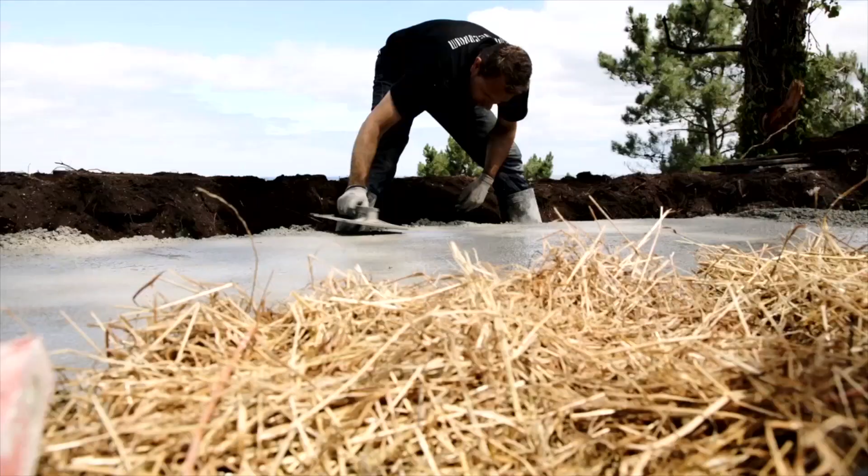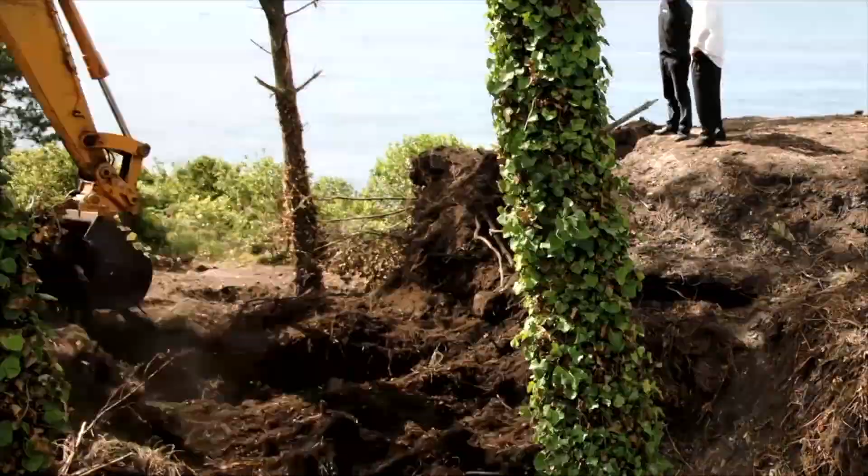This is an early project that we did, not really knowing what we were doing—just removing and putting together everything that we found on the site, a beautiful cornice of the Atlantic, putting together the existing matter: a bowl of soil just removed from the place, a volume constructed with hay bales. We cast unreinforced concrete on it, covered it, contaminated this prefabricated chunk of matter, this stone, and let it cure there.

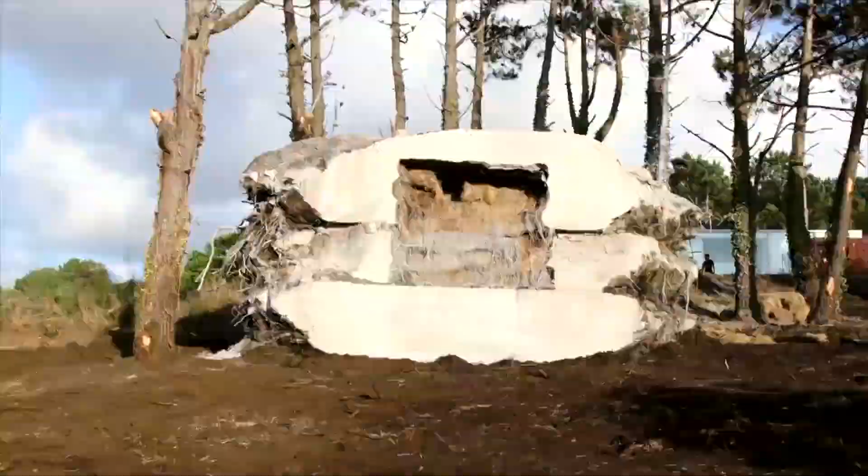And we named it the Truffle. The Truffle, almost as a parasite of nature, something that grows informally attached to that savior, to that life that is part of nature. But it was not yet an architecture project—we let it rest for a while, not really knowing what we were going to obtain from it.

What we discovered was these different lives of concrete—all this abrasive, viscous, very expressive material reacting to the cut we had just done, even though we hadn't yet revealed the space. We were already seeing all those encounters between architecture and landscape, all that age, all those wrinkles. We didn't yet have the tools to transform that.

So we borrowed cattle from our neighbor to help the process of carving out through the action of eating—curating the animal into that space, stable initially for a long year, making that long time, that long event, part of the fable, part of the narrative of how slow and sedimented all our actions should become when we deal with nature.

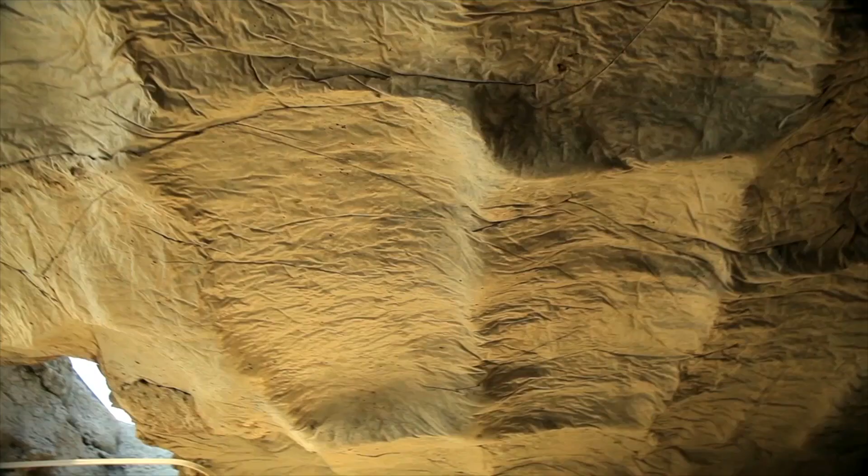All this rusticated viscosity, warm and aged already, contrasted with this liquidity of the lintel, as a petrified sea above the habitable space. And in the exterior, that informality that ultimately gave a figure to the truffle.

So this project stayed in our hearts for a long time, and a decade after, on the other side of the world, this is what makes architecture so fascinating.

We had a call from a couple of fantastic allies who wanted us to do something in this extraordinary, untouched landscape close to the Rocky Mountains, in a place called the Beartooth Mountains. This is where the continental and Pacific plaques collide, and it's another edge situation.

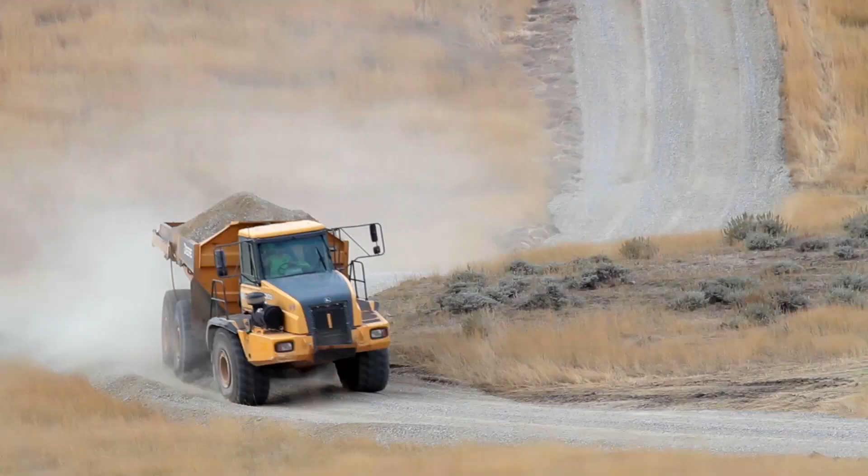It's where the Rockies stop, and suddenly there's a kind of cloth of hills, as you can see, without a tree, without a reference, without anything but cattle and wildlife, but always with that mountain on the border. So we were asked to do an art center, and we declined that idea, saying we couldn't incorporate any kind of referential building or human construct into that place. That would have ruined the experience of the program.

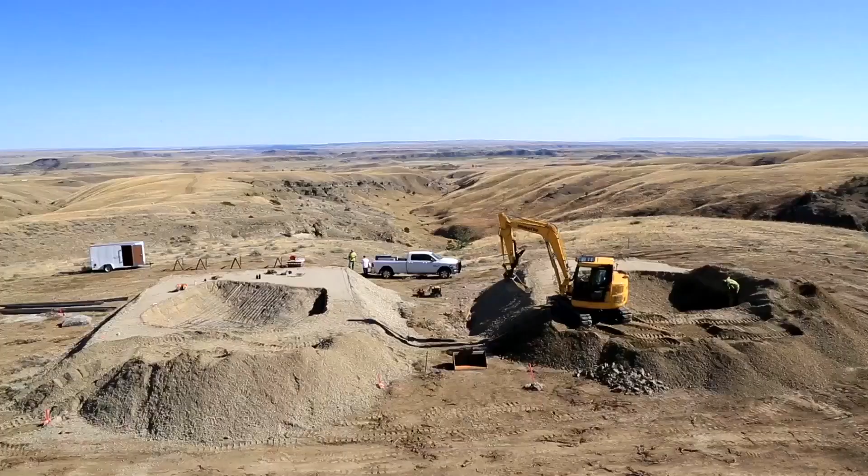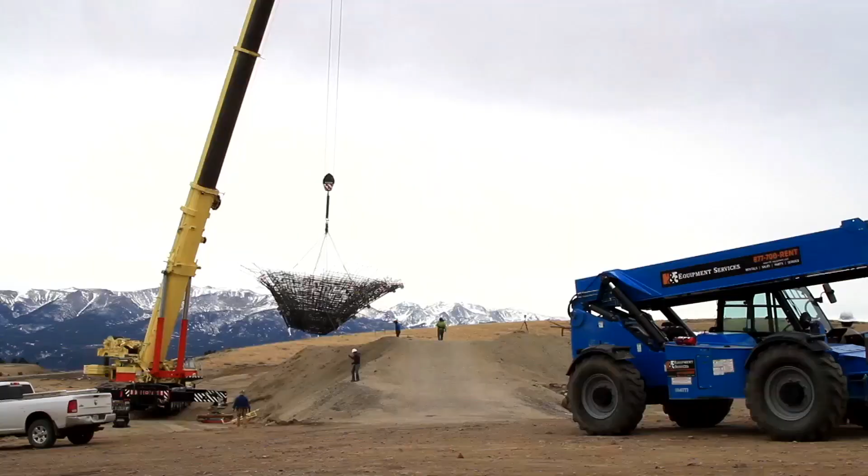That, by the way, was the contemplation of art, music experience, concerts, sculpture, but always in a special communion with the terrain, with the land. So we created a craft, a tectonic, and a language that had to be, we called it pre-architectural. We tried to avoid any kind of reference system or procedure we had previously known.

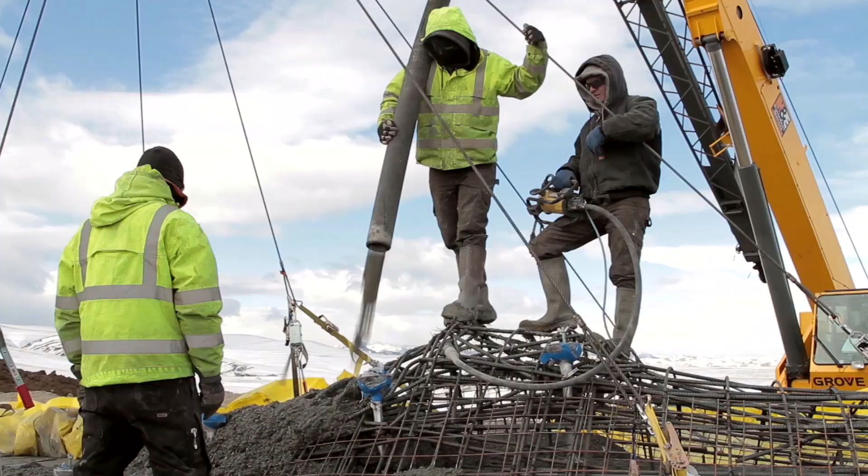So all our actions, as you can see in this video, was to emulate the gestures of the geologies of the place, using concrete as a very artificial conglomerate of all the soils, the crushed rocks, the pigmentation, but all done in a very wrong way - the anti-Swiss mode of doing concrete.

Just breaking all the given rules, not mixing properly the cast, wrinkling the formwork, throwing the pigments, contaminating, giving weaker resistance and not considering the thickness. And also

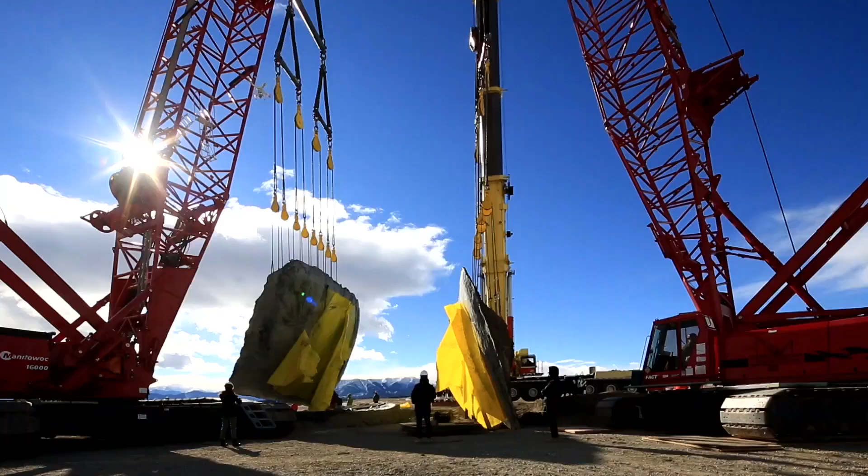preserving this fabulous moment of unearthing, of birth - all that excitement of a gravitatorial, I would say, initiatic moment. That slight contact, that crush, that connection, that arch is actually the portal, the entry, the door of the art center.

The art center is a constellation of pieces that refer to each other as stones or as stars that were dropped there. So these situations of very primal equilibrium, informal and

raw, create within the program the entries to that experiential or human world previously occupied by ranching and wildlife activities. So without being very disruptive, we tried to immediately connect with, I would say, the primal souls of the place - these kind of totemic figures.

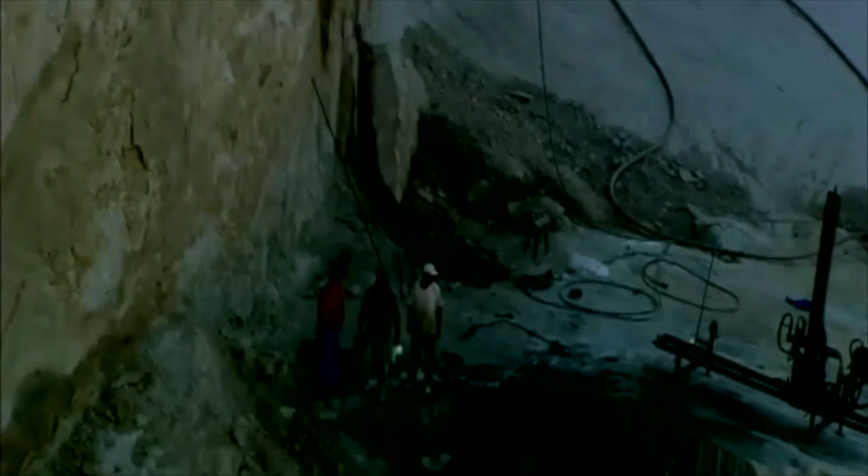Or a second project that we did in the same plot, also in Santiago de Compostela, where our challenge was to go a little bit backwards within the culture of Santiago de Compostela that is well known since the early medieval ages. But there's an outstanding megalithical culture that goes from Galicia all the way to La Bretagne, with a lot of megalithical constructions that we want to honor.

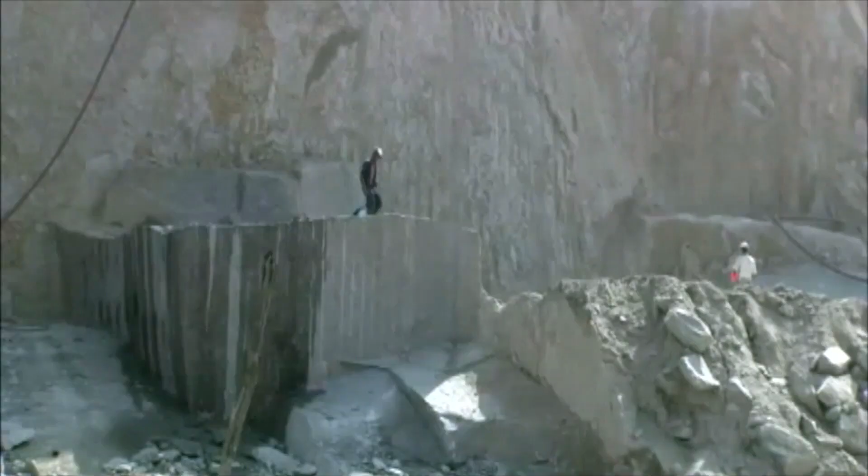So we had the capacity to convince our historical commission that our look to history was longer than the city, but still part of the place. We wanted to make that connection between the megalithic tectonics and all its limitations by mass, weight, and cut of these pieces, and the contextual of the place.

So everything starts with an explosion. It's really violent, and this is what makes so fabulous this destruction, where everything that we produce begins. So we wanted to go to that origin, to that Big Bang, to see how all these initial pieces that are obtained through explosion or through the first cuts, that are extremely raw, could be used as an immediate architectonic part.

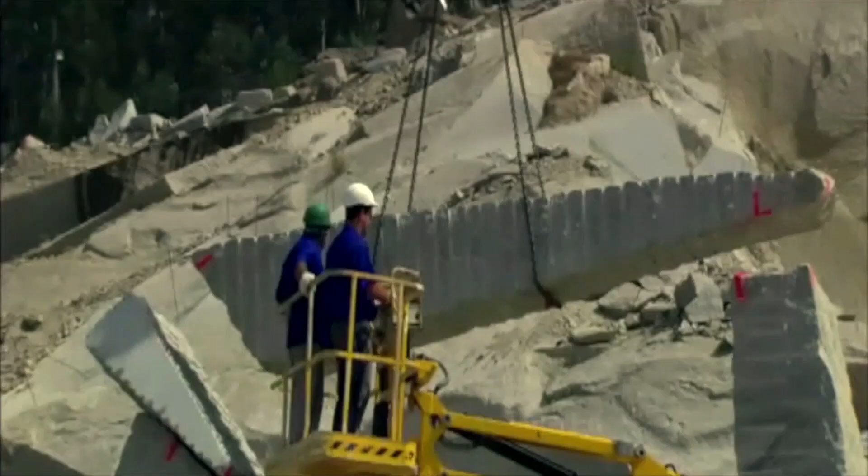Of course, we didn't have laser scans or photogrammetric techniques. This is pretty much 15 years ago. So we had to use the scientific method of try and error. We started to understand how important it was to be able to prefabricate something, to test it, to make it, to develop the technology, to develop the expressiveness, and ultimately to do the architecture project and the engineering.

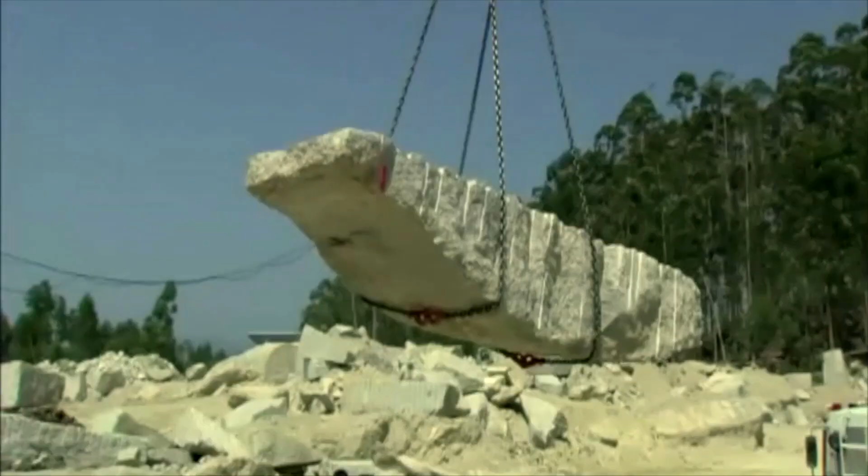Everything that started in the quarry, where we pretty much moved all our practice for several months. I will never forget that experience, because we had to choose, identify, pretty much sketch rapidly and try to figure out where the center of masses were, more or less, so we could find a way to grab it with those chains, convince all these guys to use their tools in our behalf, not just to crush those stones or cut them, but to precisely locate them in the places and in the order that we were dreaming of.

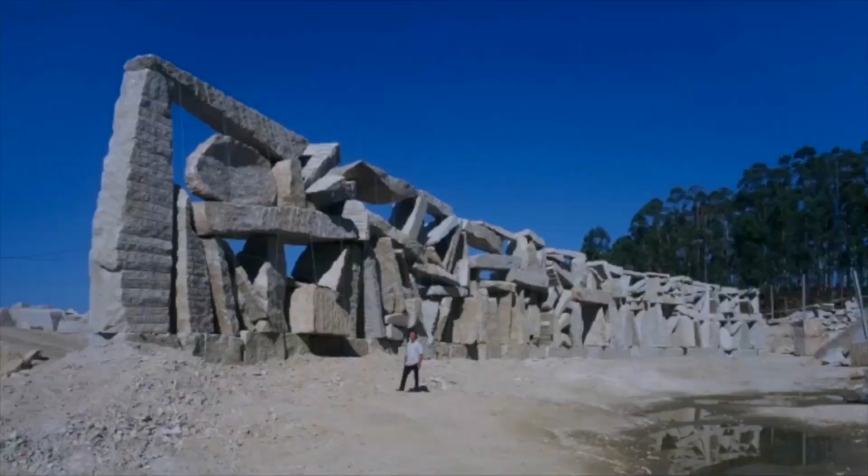Because again, we had not yet done the project. We had the license, we did something to serve the municipal government. It was blurry enough that we could pretty much do anything. And here is where we take use of the art world, because everything that is artistic is free. So that was, even though it's a structural wall, perfectly performative, and it weighs 1,000 tons, we could hide this structure under the idea of being an artistic facade, or I don't remember how we named it.

The fact is that we started placing one stone after another, and that went out of control, and we actually built the full structure in the quarry. It was beautiful, we measured it, and I still remember when I called my engineer, and he came to the quarry, he says, 'It looks pretty good, actually.' But there was no way to anticipate the performance or the behavior of all of those stones that were placed there.

Even though I always say that this is the most stable and safe structure I've ever built. Firstly, because I did it twice, and I could correct minor encounters. And the fact is that when we dismantled it to redo it on the site, we were also the contractors. I operated as GC, as general contractor here. I think it was the only way to be capable to do it.

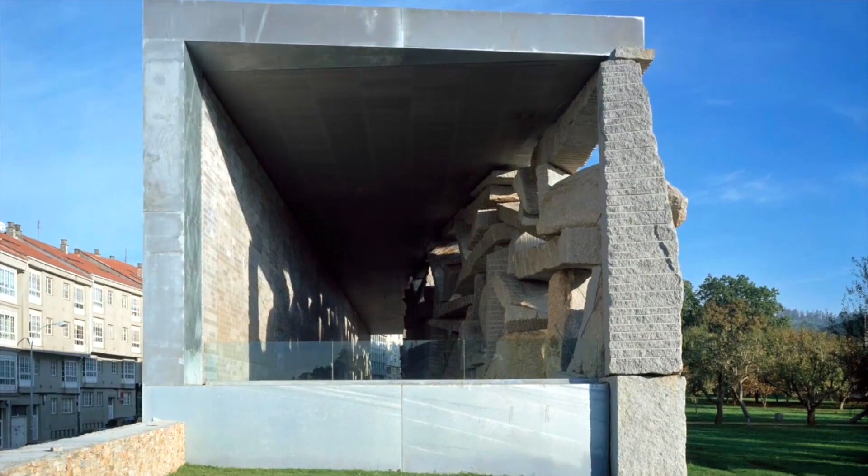But we discovered that once we had placed those stones in the quarry, by signing with a red spray where those gravitational connections were happening, we really were able to rebuild it in a fraction of the time, in a very safe condition. It seemed like those stones had already found their place and they were comfortable in their position. But again, the ultimate idea is that all these chunks of matter redistributed and reorganized become part of the architecture, archetypical part.

And now I'm in Menorca. Music, please.

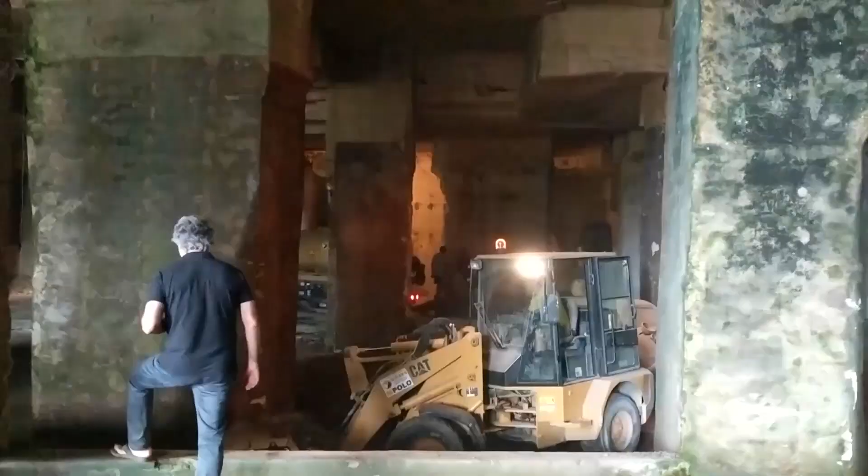This might be, I don't know, but one of the last projects I do with this attitude. And this is the most radical, because in this case I'm just not doing nothing. I had the fortune to find this beautiful abandoned mine in Menorca, and I just have to clean it and use the technology not to ruin it. And find a program, because I love it, I want to use it, but I don't know what to do with it.

So we started this by inserting light and air, as this first stone, this ceremonial moment of birth of architecture.

We did this event of chopping a stone from the lintel of the quarry with a little olive tree that arrived almost dead, but we put it vertically, through this oculus that has 9 meters deep into the gut of the terrain. We understand this is the first stone, the keystone of the equilibrium of all that given fruit of the earth. The rest of the project was 3D scanned.

Look at these beautiful drawings. I would love to say that these come from my gifted hand of representation, but they're just the 3D scans. So this opens another reflection about representation, what was the role of architects, how we can use technology to express an architectonical idea.

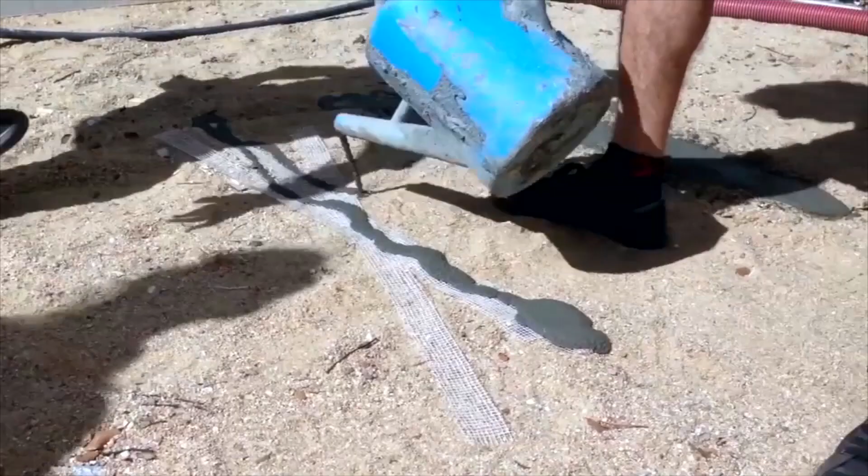Now we are doing—when I mean now, I mean that I was doing it yesterday. So not this part, but what you're going to see at the end. I think it's a non-edited video that I produced rapidly, but I think it was interesting to understand our vision of the architecture of the earth.

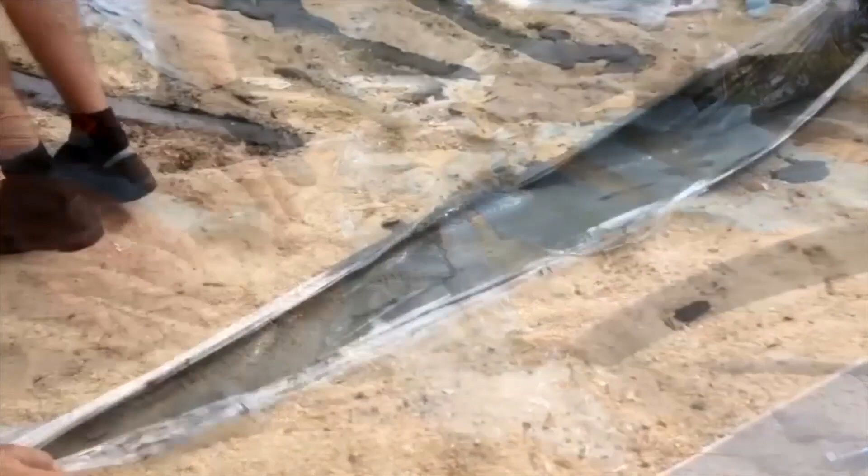This is an installation—a hybrid between an art piece and an architecture construct that we were commissioned to do, to celebrate a big exhibition that's going to be held in New York at the Cooper Hewitt Smithsonian Museum about nature. So they told us to do something in the beautiful garden they have in front of Central Park. So what we presented, and they accepted it...

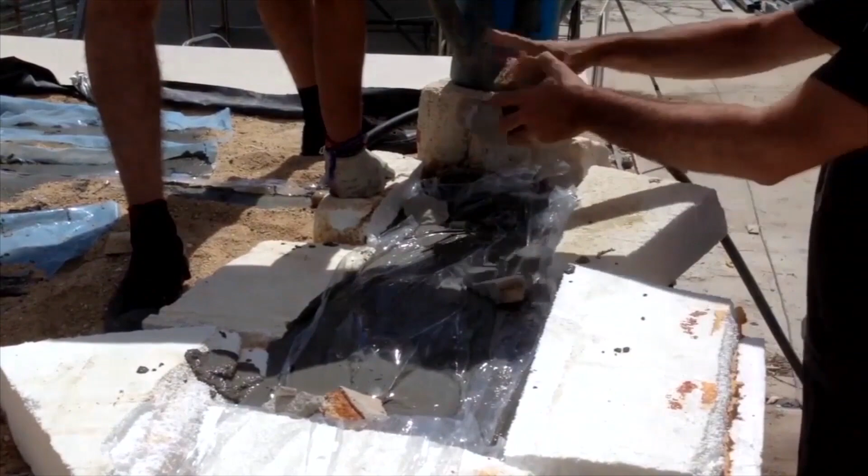We said that we were going to prefabricate a river, knowing that before architecture came to Manhattan, we gridded everything and flattened it, and we have that beautiful and amazing city that we all love. Before, the island was full of hills, rivers, and a lot of natural beauty that was not erased—it's there, it's kept, it's hidden, souterrain.

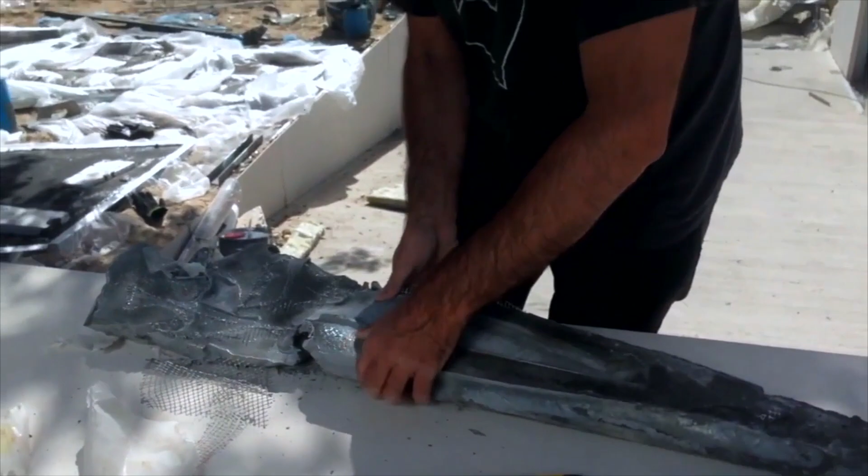So we're going to lift it, and fabricate this metaphor into a massive concrete structure. So that river—this is all the sketching process where we produced a lot of rivers, and some of them were structural, some were part of the standing point. So all these traces of structure, these beams, are performative like any other structure.

In the meanwhile, we were commissioned to do a little passerelle in China. So we used this same idea to create a bridge that was not jumping from street to street, it was part of the river. So this bridge...

was designed through all those traces, and we faced a dilemma, which is that we loved them all. We didn't care which fluidity was part of that building, that structure—understanding that when that concept is clear or knitted enough, the formal aspects of it are pretty much irrelevant. I think this is very, very surprising. It's like if you look at a stone and another stone, there's no formal preference.

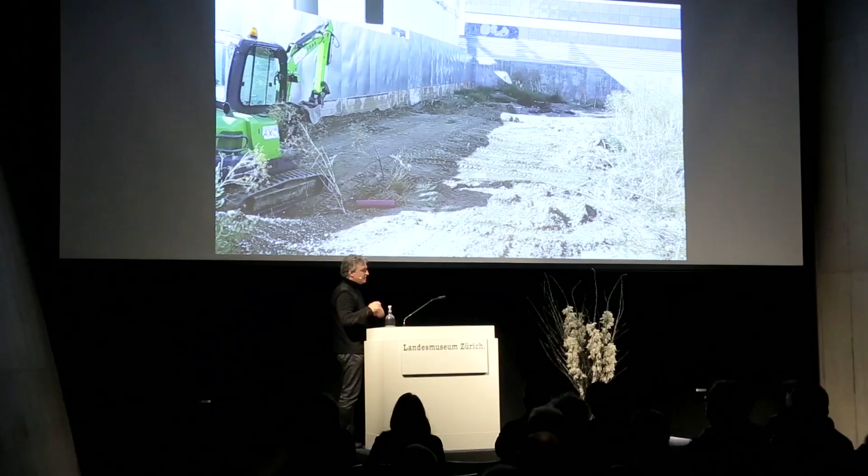So after all this back and forth, from a conceptual part to a more urbanistical relationship with the landscape, now we are abstracted, and these are images from last week, pretty much, where we did the prototype.

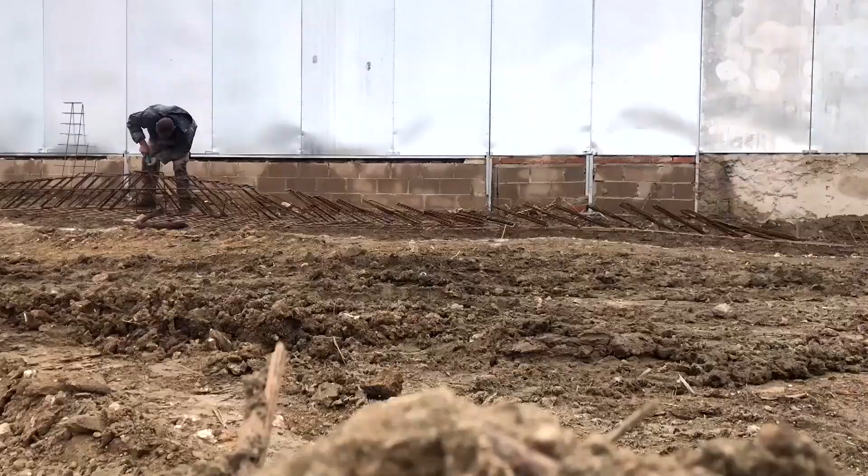It's not the real structure, but we did a prototype, at a scale I would say of 1 to 2. We will build another of these petrified rivers for the museum, but we wanted to rehearse it, to test it—not only mechanically, but also the materiality. As you can see, everything departs from the terrain with small preparation and a lot of uncertainty, and this is the contradiction.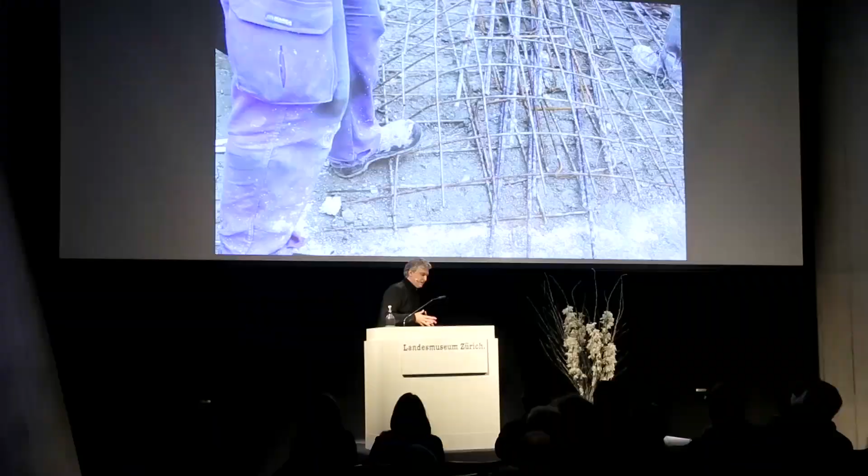How the formal, and I would say metaphorical, uncertainty given by the fluidity of the concrete when you let it loose has to be combined with a total precision of where those tensions travel through the guts—the reinforcement. So the combination of what you leave as freedom and what you control as the driver of that freedom is what we were working on.

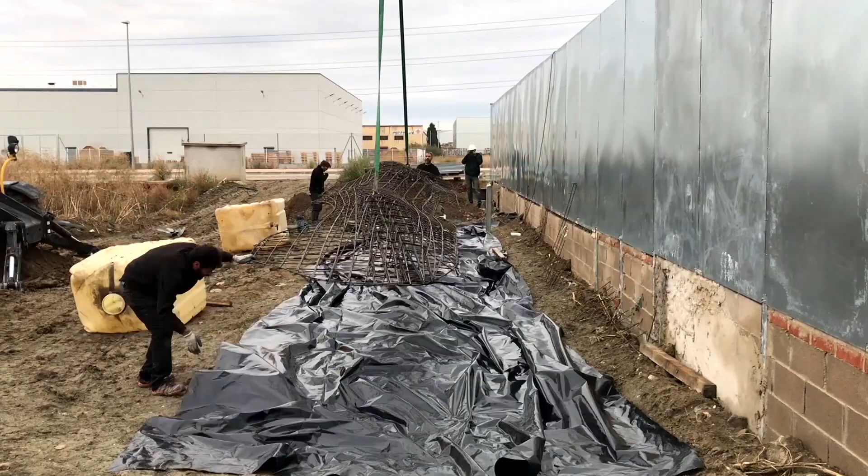So we decided to make a very simple differentiation. We were going to fully control the reinforcement and leave the liquid part of the composite beam pretty much flow and create that beautiful and poetic form.

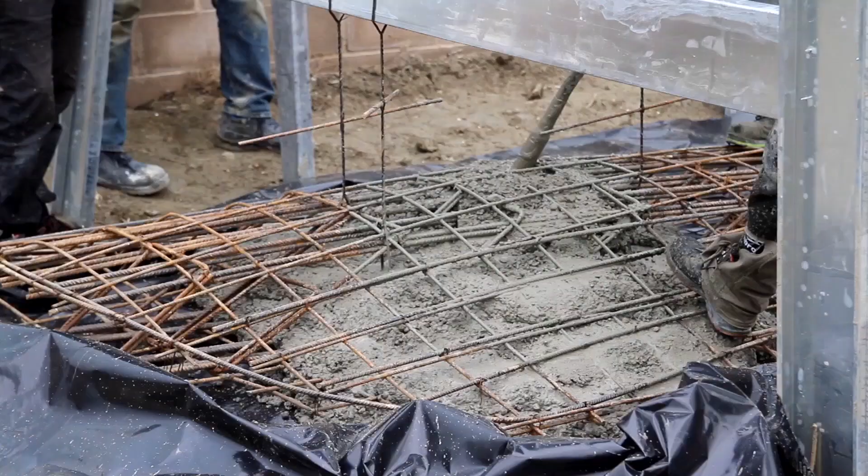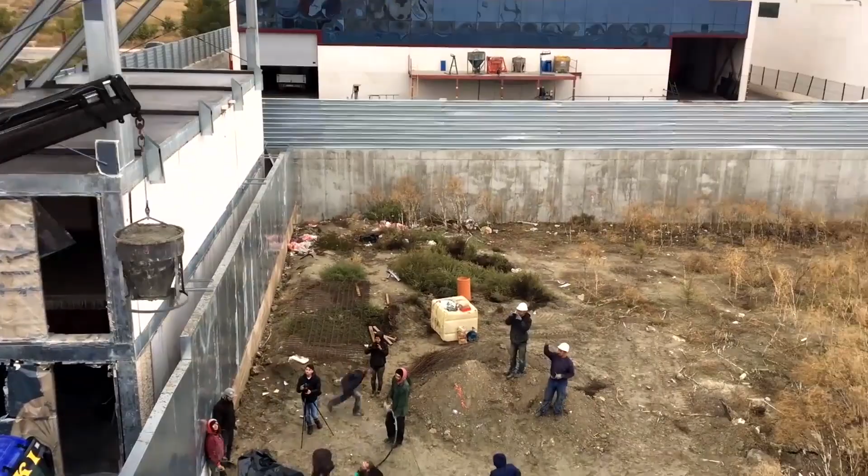The specific characteristic of this technique is just controlling, with a little bit of extra sensibility, the plasticity of concrete. So we just add more fluidificant or more water, depending on which part we want looser or straighter, or just to maintain it, and the amount of vibration. Somehow we are working with forces that we apply constantly to matter, to try to depict with them the ultimate appearance of the project.

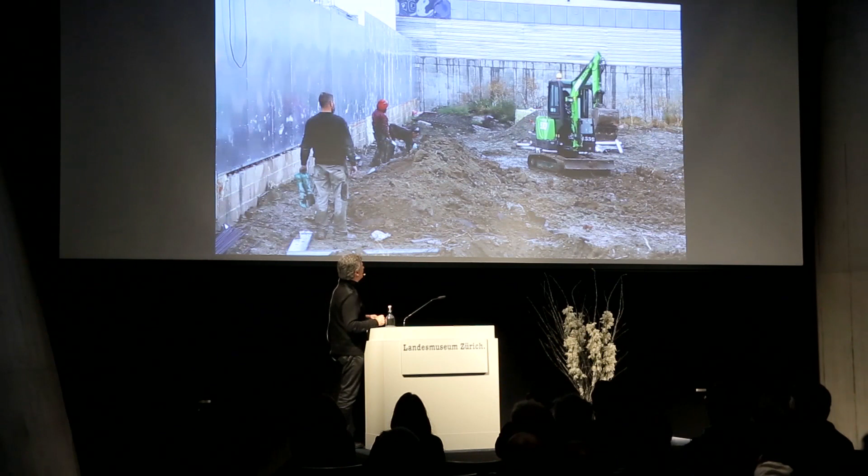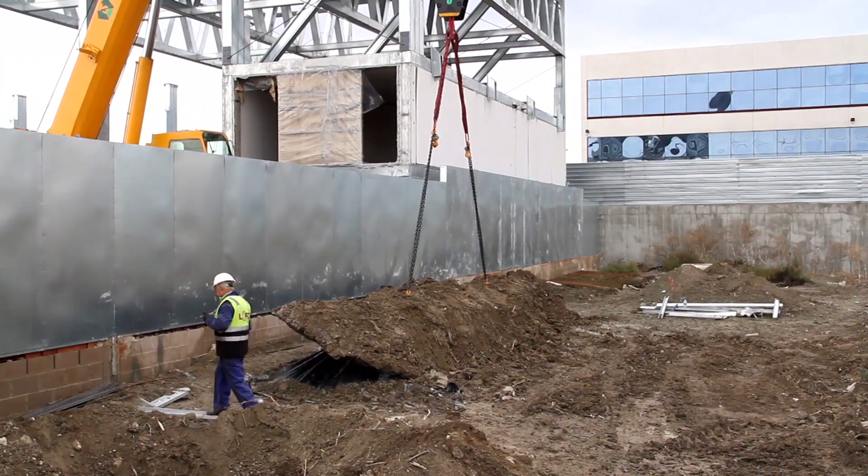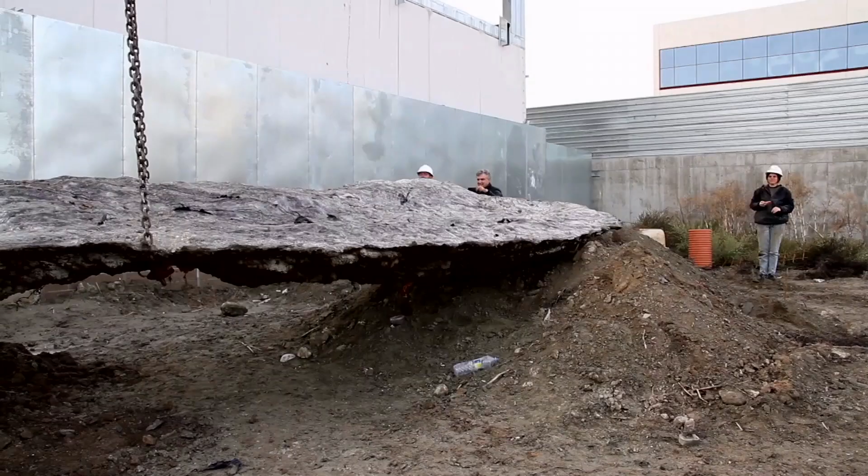Dangerous stuff—these 22 tons became a structural beam that worked out very well in the deformation test, like any kind of architecture structure. But formally it had this kind of appearance, this abrupt and very expressive surface, where we could ultimately create that landscape—an oneirical scale landscape—and also enough stiffness to fly and be kind of unveiled over the existing soil.

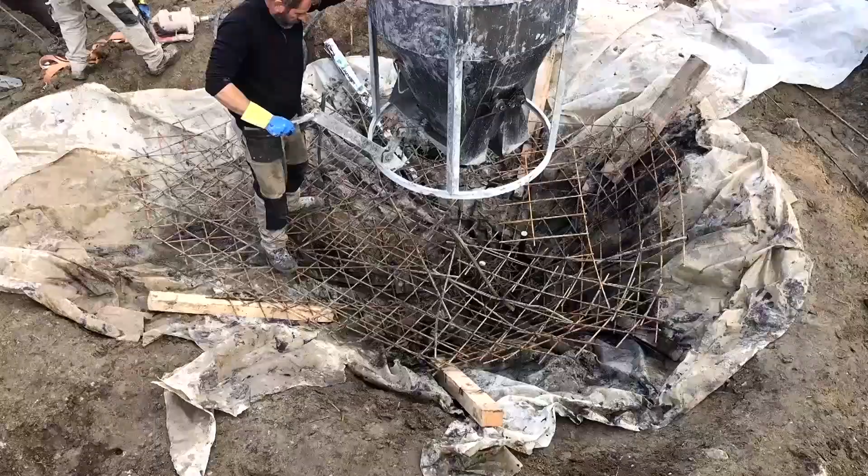The other piece, where the river flows, is to a lake, a pond, or the sea. So we are creating a big vase, almost like a Baroque fontanone, where all that water and all that inertia and all the equilibrium of this long structural trace departs. But this structure, which we cast last week...

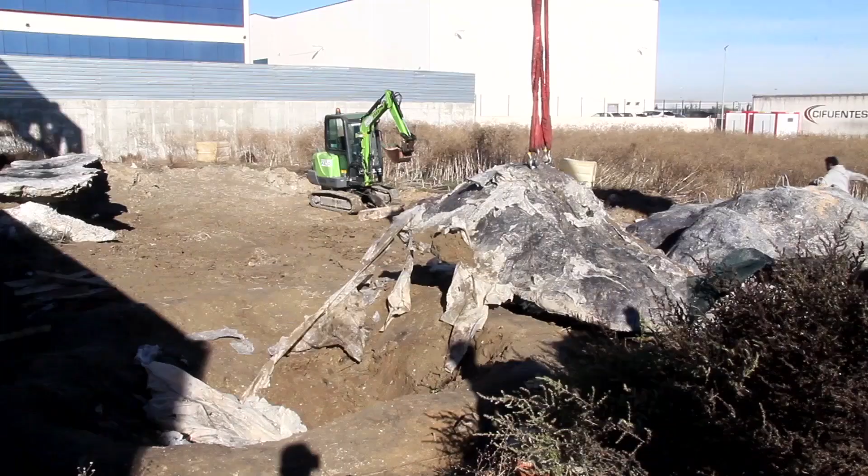It has a very important engineering prefabrication scale—it will fit pretty much in the middle of this auditorium, a little bit smaller, but it has to be transported to New York. So we're using prefabrication techniques, breaking that vase into parts to be able to reassemble them.

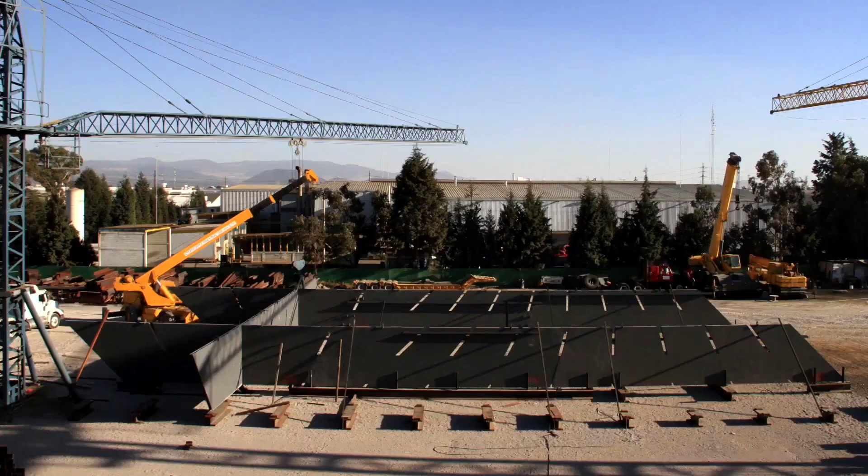This is a theater that we built in Mexico City, where the nature of the assembly, the prefabrication of the parts, was also part of the tectonical logic and the form.

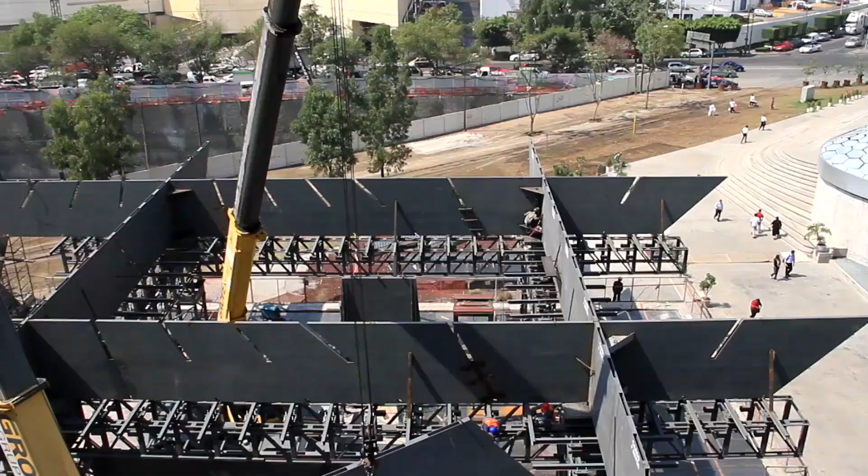We wanted to create another stone. In this case, we call it in Spanish la piedra del sol, the sunstone, la dovela, la clave. These are very metaphorical visions of Mesoamerican Aztec culture, almost sacred pieces of their imaginarium, relating the sun as a stone to the figures we create as humans as stones.

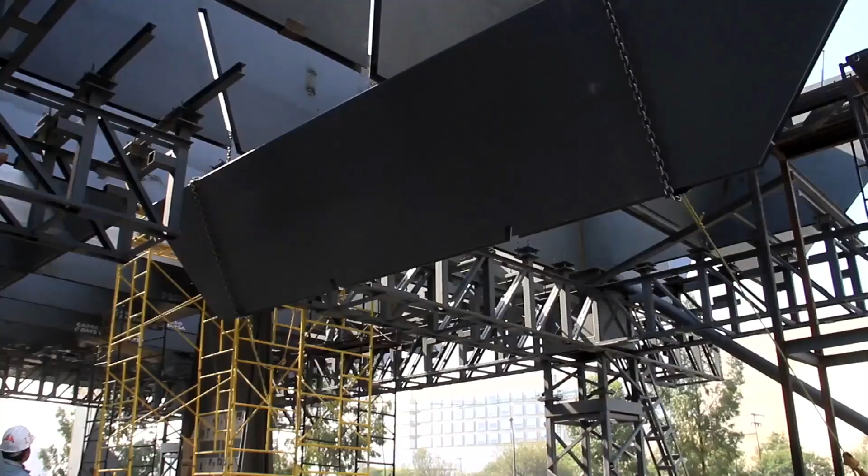So I wanted this capacity of the sun, the light, and the gravity to be combined in a special way that you could feel all these presences. It's just a structure that levitates over a big hole in the ground.

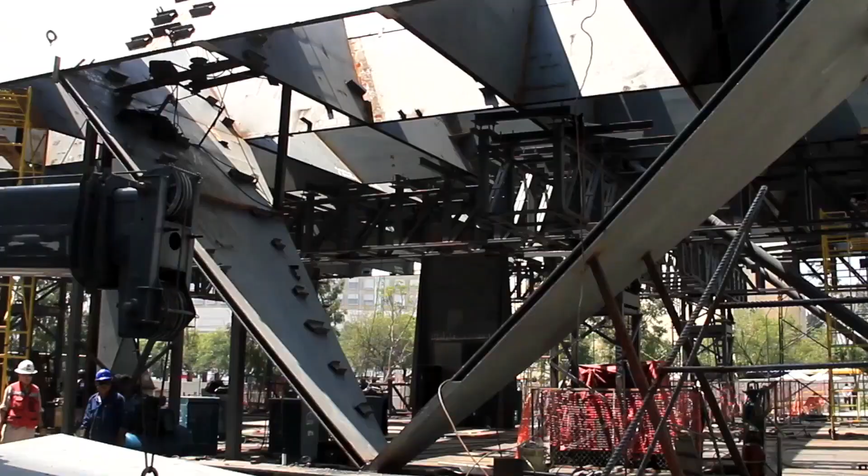So everything was the equilibrium of a big excavation that holds the black box of the theater, and that levitating stone combined with these bidirectional steel plates would operate as a very symbolical figure that could represent the existence of that hidden gem, that space that is totally excavated.

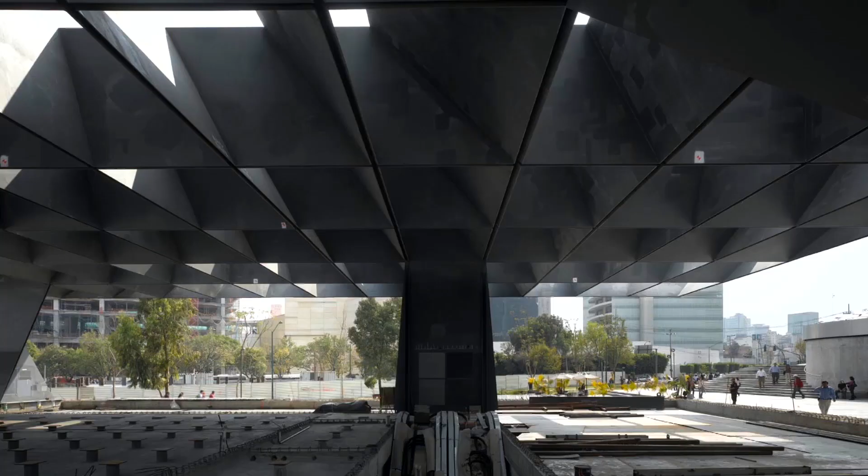So we built all this excavation with everything covered, and one day we just opened it, and most of the people who were in the rest of the buildings didn't realize what was going on inside. That was a very interesting moment.

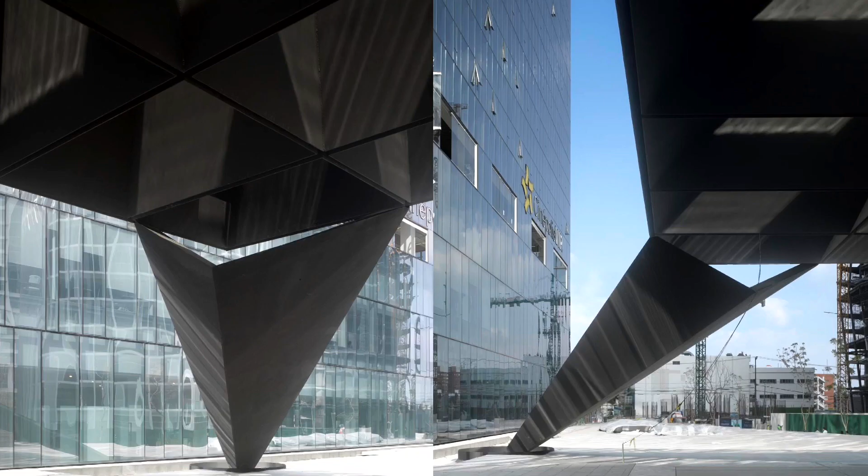As you can see, this dovela operates with its deformations over the four columns that hide in their form, their deformation, their position. They hide their gravitatorial consistency. And that's why all the gravitas, all the weight, and the distinguished light become part of the matter of the stone, not as projected light. This is what makes that construct of the dovela interesting.

In the point of view of the place, of the city, this little building was surrounded by huge towers and museums and big buildings, so we wanted to make a very silent, 5-meter high canopy where the presence of space was defying the formal monumentality of the neighbors.

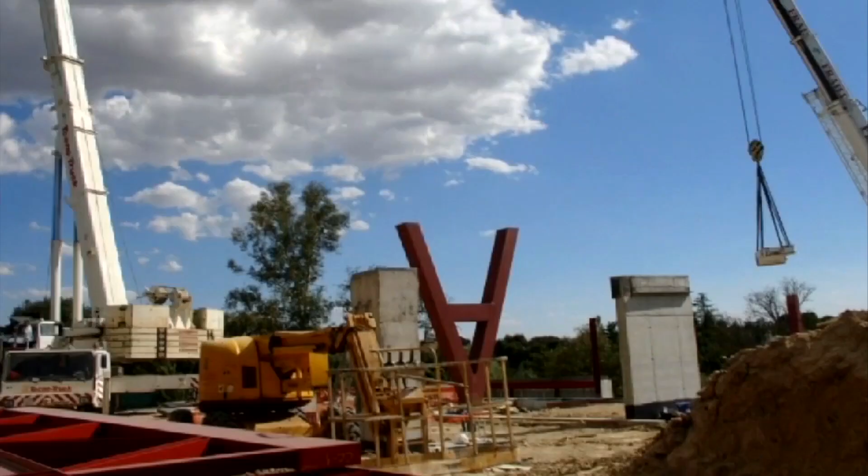In parallel to these last projects, we were building a house, the Hemeroscopium house, where we wanted to celebrate this logic of prefabrication to the ultimate case. So we just went to a catalog of off-the-shelf civil engineering: I-beams, slabs, vaulted artesas — I don't know how to say it in English — this beam.

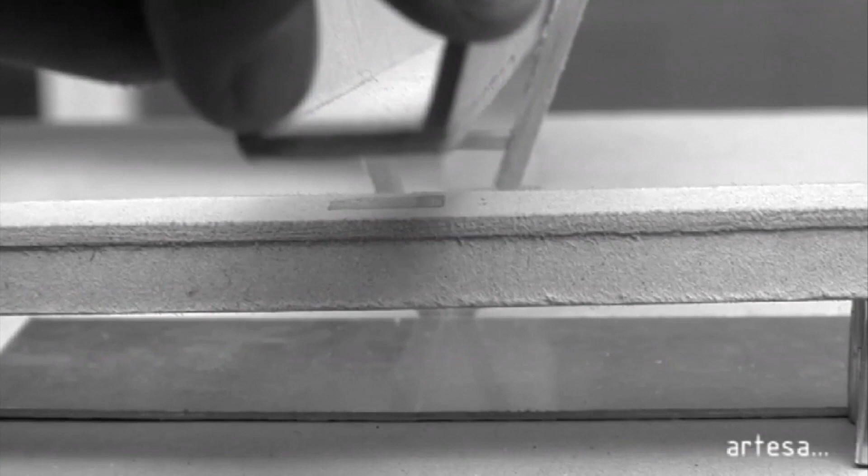And we just reorganized them in an unprecedented way, differentiating between its formal conditions — the I-beam, the U, the slab — with the pretension and post-tensioning connections that were all fully custom. I wanted to detach the performance, the stresses that flow through the guts of those forms within its form. I think this is what concrete offers us: this versatility of operations, of performance.

In terms of the formal aspects of each of these pieces, we were just interested in creating a gravitatorial itinerary, a helicoidal transit of that transmission of gravitas, to create a certain space that was balanced by the action of those heavy presences, those heavy traces of those beams that were defining a space without enclosing it — a courtyard house in this case.

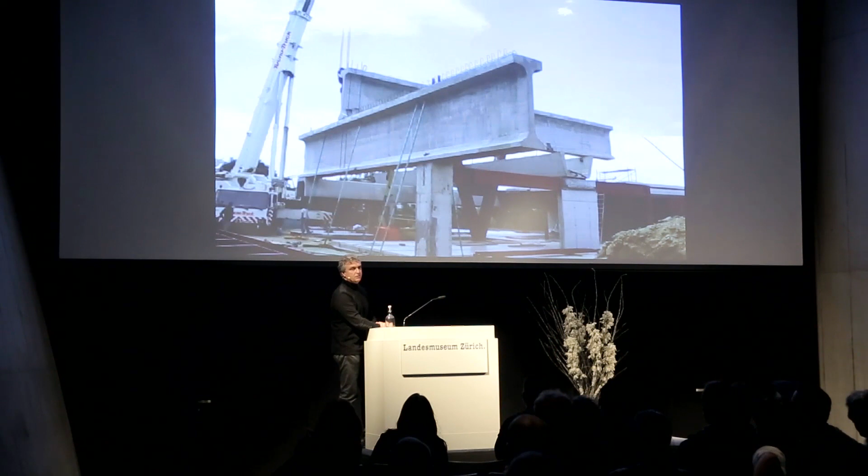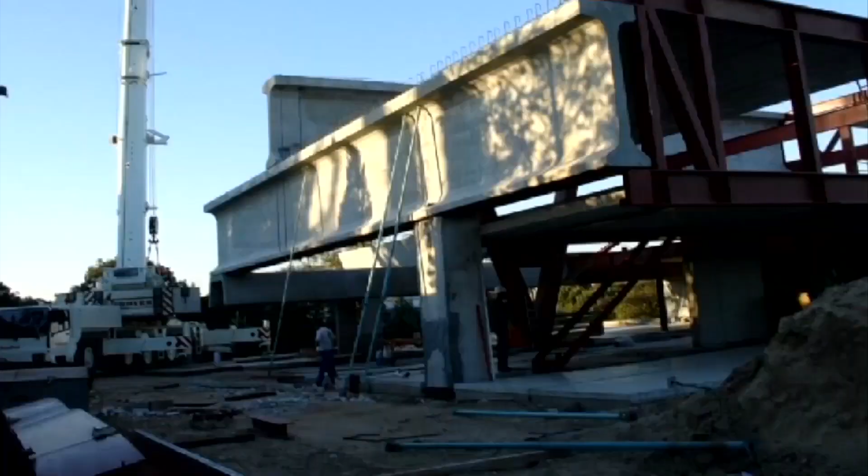And ultimately, what surprised us again is how the space became extraordinarily light, transparent, and fluid, even though it was constructed by these very heavy pieces — heavy and pretty much soulless pieces. How indifferent is the form of an I-beam to the rest, even though it was designed that way to really perform efficiently?

But it becomes part of a cornice, it becomes part of a facade. Suddenly the beam is not a beam anymore, it's part of a wall. So it acquires a different significance just by participating in that conglomerate of pieces, just by being incorporated into a system, and just by detonating that spatiality.

That spatiality that was cut, that itinerary of gravity, was counterbalanced by that keystone — again, the same word with different meanings. That keystone we call the G-spot, that is perfectly located and closes the balance of the structure. And that was a gift of the quarry guy.

And this is the result: the transparency, that integration of those traces to the wrinkles of the landscape. It's the reversal of what we tried with the truffle, where all the space was wrinkled and the landscape was providing the single line. So I think these dualities between geometries, masses, and forms is what becomes part of the architecture discourse.

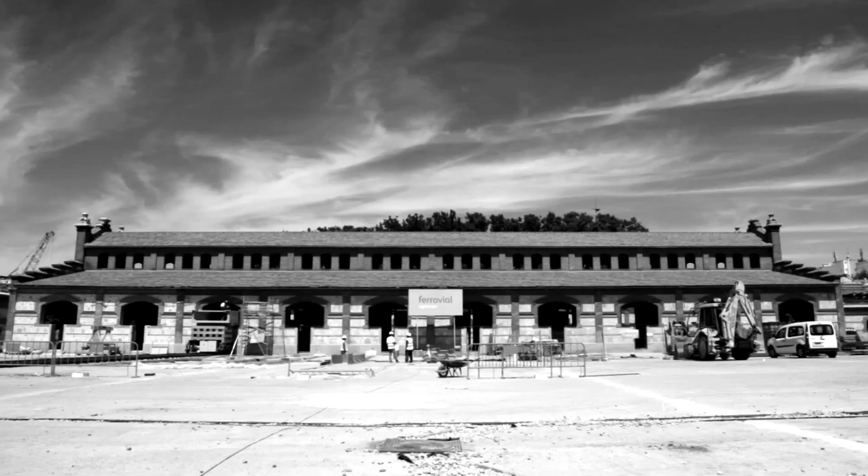After doing this house, we had the chance to do a historical transformation of a slaughterhouse into a mediatheque. This building was fully protected by municipal government, untouchable. So the only thing we could do was solve the hygiene of the walls, incorporate MEPs.

But by doing this kind of celebration of the engineering, we could convince everybody that all these pieces were part of the mobile, of the furnishing of the house — something you inserted through the door or through the window. So it was accepted, and even though each of those weighed 50 tons and had an independent structure, they were part of that mobile tectonic. It came up, it was inserted, almost sneaking into that space, not becoming part of it, not touching it.

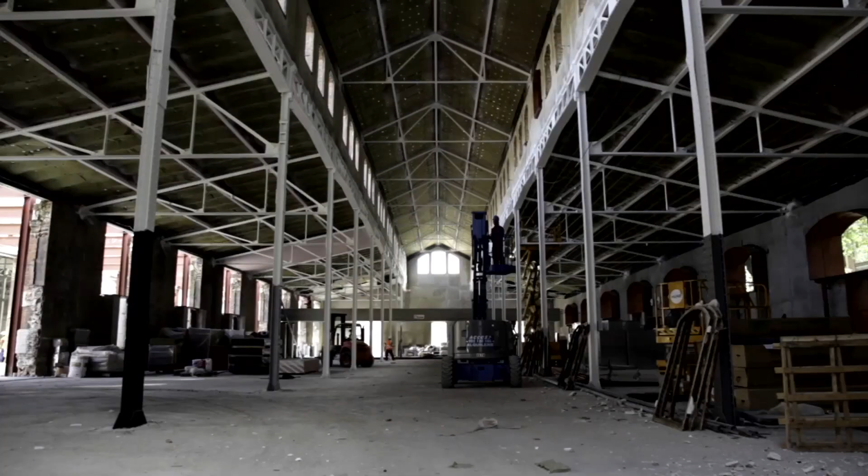So here we learned another lesson about the structure. Structure of a building doesn't have to support anything. It has to contain. It has to add order. It has to provoke that kind of dissonance through its presence. This is the kind of exercise that we produce here. We inserted into that system this very impure, almost unprecedented part that pretty much contradicted all the existing structure.

The collision between the fragility of that metal structure, the trusses, the order, the vertical, almost basilical space, being contradicted or sometimes defied by those transversal and horizontal traces that didn't touch each other, but operate simultaneously as a sole structure. I think this is the most surprising part of this project—this encounter of two artifacts that don't recognize each other, don't touch each other, don't even respond to each other, but they work as a unit.

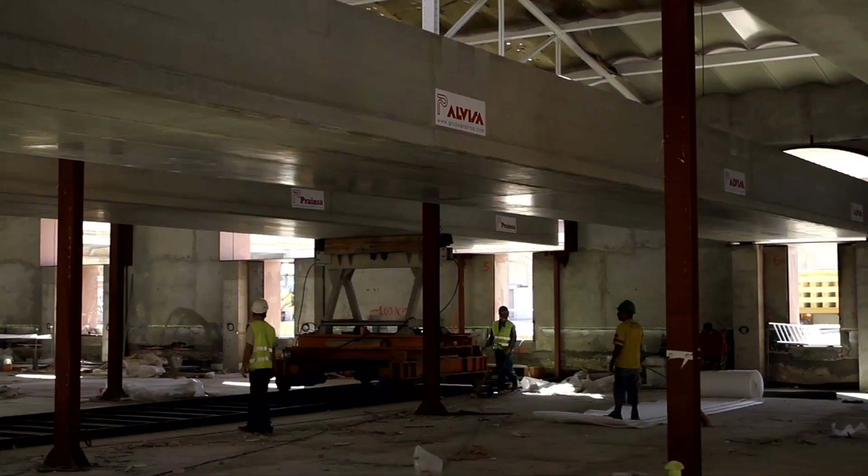But all this could be done through the development of these prefabrication techniques. So we have to use the craft of engineering and the logics of the offsite to respond to our ideals. And I think this project does respond properly, by inserting and doing all this engineering effort just to introduce structural parts into the core of a historical building.

And by doing that, the transformation was integral, and the basilical slaughterhouse never felt again like that industrial building. Suddenly, the space had been extraordinarily reinterpreted. And I think this is one of the most important goals of architecture in these interventions in existing buildings that do have a history and a past that is sometimes difficult to transform.

This compound of slaughterhouses in the center of Madrid, in Matadero, is now part of a cultural network of emerging art initiatives, younger initiatives that used this pretty much residual infrastructure, but required a total reinterpretation and transformation. So all these buildings that I've shown you occurred before, except the ones in Montana.

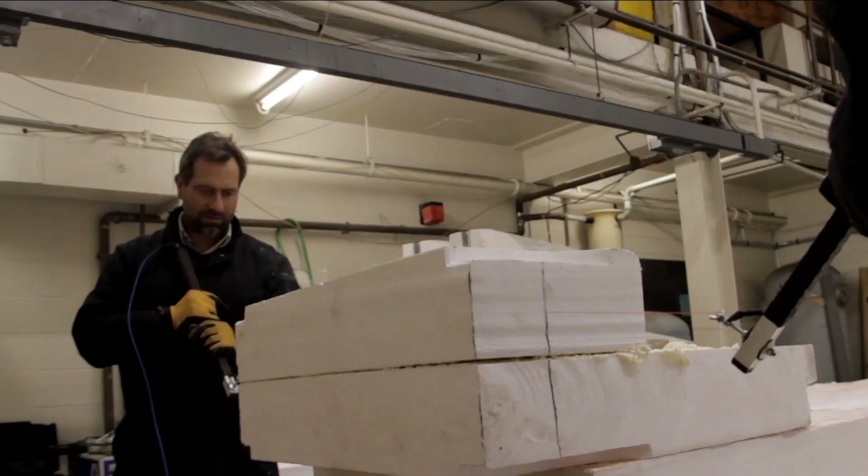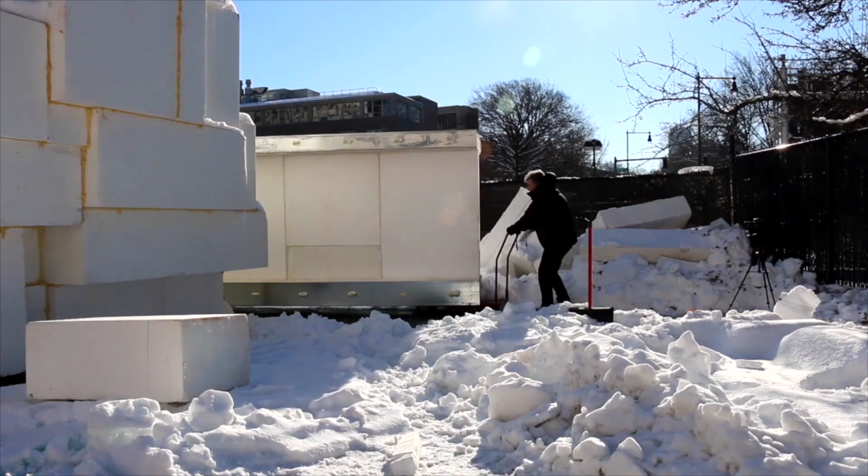But this last one—before I went to the United States, to MIT, to found a lab called the POP Lab, Prototypes of Prefabrication. This occurred about 5 years ago when I moved there. I had already been researching all my career, so the idea of starting research again was kind of unpleasant. So what I did was continue the research, but challenge everything I had done before as a mental exercise.

So I started building these I-beams, colossal big I-beams, but they didn't have the mass. They did produce the same weight in terms of the space, the presence, the trace, but they were lacking the mass. Instead of being pre-stressed concrete, it was post-tension foam.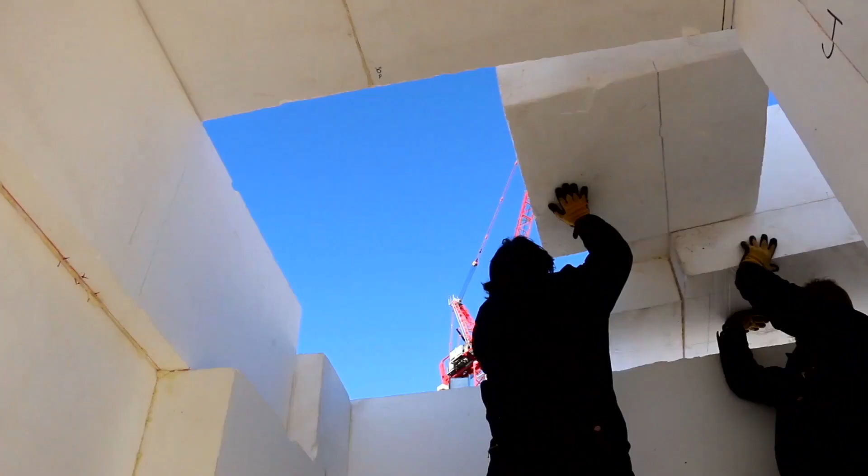So I said, okay, let's try to do a construct like the ones we did in Santiago de Compostela with those heavy lifting stones, some close to 30 and 40 tons. Let's do that with these blocks of pretty much air, foam, pretty much like a model, so we could carry them. I wanted to experience what I had been following intellectually, but I wanted to see the empirical evidence that architects sometimes confuse the terminology of weight as a force or weight as a mass.

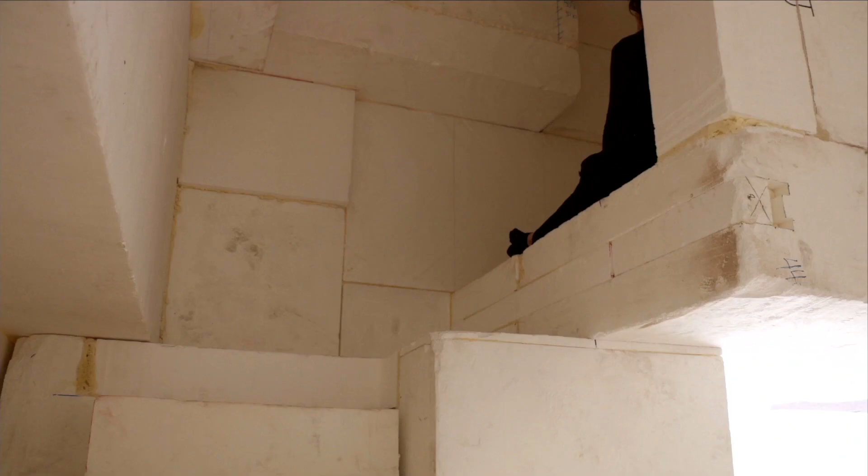And what really interests us architects is the weight as a force, because that's the one that detonates the spatial experience. The mass per se is a characteristic innate of matter that could only be experienced on the bascule. So we kind of enjoyed the lack of mass, but still wanted the firmitas, the weight, the presence, the cyclopean.

So I spun off the research immediately—I'm that kind of academic that cannot be in academia too much. I went back to Madrid, opened shop. Even though it was with some of my students, we decided to build a house immediately ready to be built, with an outstanding challenge: I wanted to build it in Madrid and ship it to the United States.

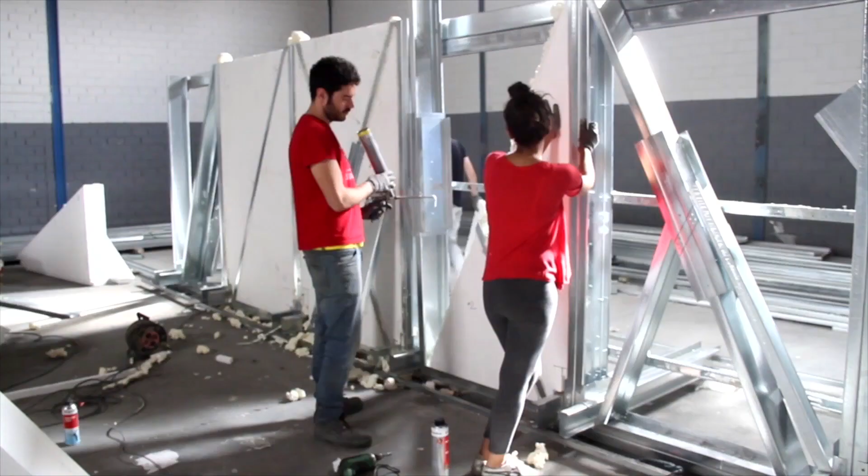So the prefabricability had to fit the transportation networks, had to be light, had to be strongly insulated, it had to be performative, it had to be up to code, it had to be a piece of architecture that was going to be erected above an existing garage.

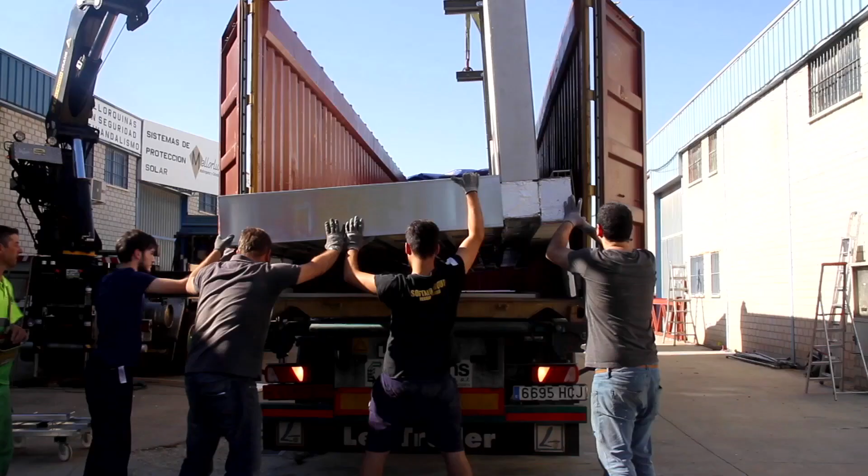So it was, I would say, a la carte technology that had to respond to our—Deborah's and my—idearium of let's find architecture that has no mass but contains all the weight, and is capable of being flat-packed and transported overseas. That was the challenge. So we built it.

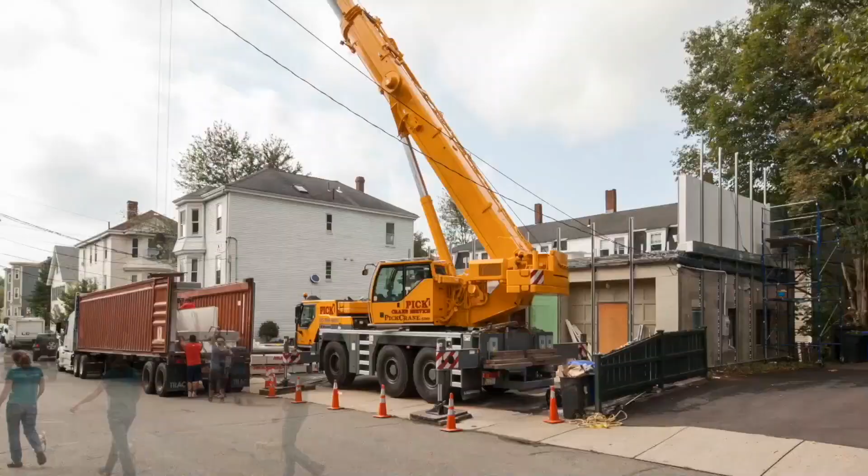It's actually our office in Boston. As you can see, it settles above an existing structure, so lightness helps very much. And we had to develop this encounter of traditions—here we put together the tectonics that we love in Europe, the big pieces, the prefabrication, etc., with the logic of the Anglo-Saxon systemic 4x8 panelized system. And we built this multi-purpose space that serves as office and family room, as an extension of our living space that is below in the garage.

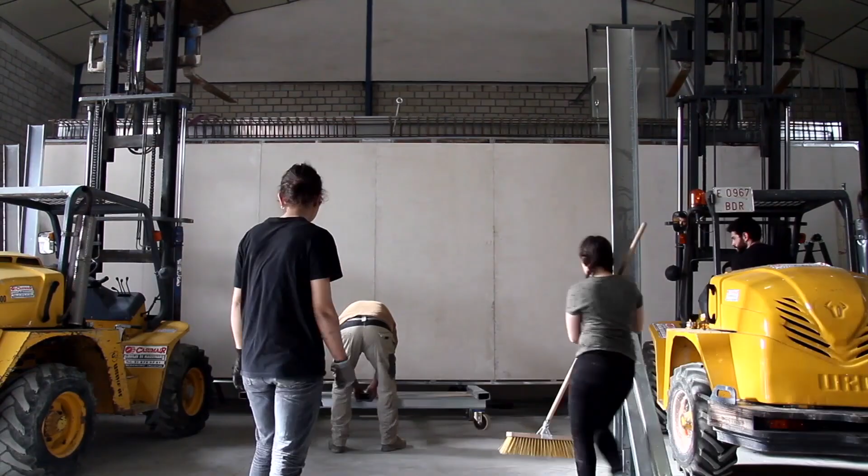But this is our ground zero of what we're working on now, because this opened our eyes and the appetite of some business investors who understood that all the industry of construction in the United States is moving to prefabrication. It's merging to offsite. Buildings are not taking advantage of any of the tools that we have available—advanced manufacturing, robotics, this kind of matter-to-data connections, things that we do continuously in our labs, but the industry is not yet ready. So we started to prepare for this wave that might impact especially architecture design as it is today, and engineering.

And we are actually building an Ensamble Fabrica as the factorial lab in a bigger scale, where we started to redevelop all the pieces and parts that we had done for our house.

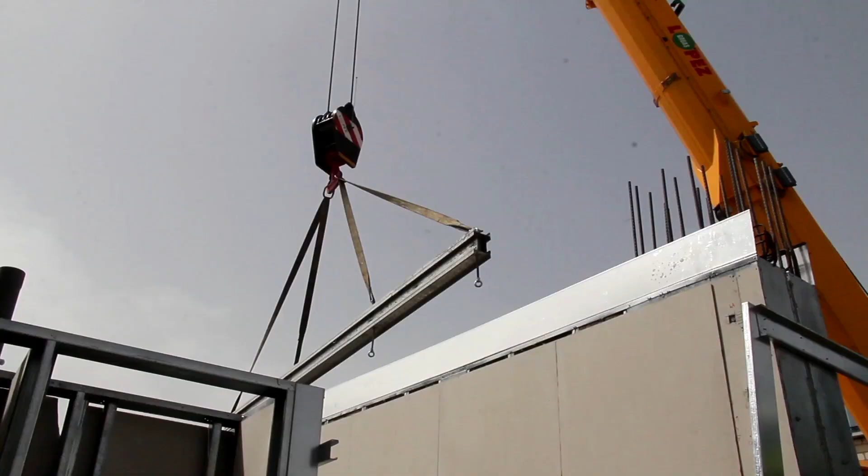I can't disclose all the tricks because I would have to kill you all, but the fact is that the technology is pretty much taking advantage of two traditions: the European, where we do buildings in concrete, and the North American, where buildings are framed in light stud material. So if we put this together, we understood that walls, beams, and slabs could be engineered taking advantage of all the manufacturing, robotics, prefabrication parts, and lightness.

This is the key part, containing all the different parts of the building except the liquid of the concrete. So I'm dissociating again the performative part of the concrete structure and the conglomerate.

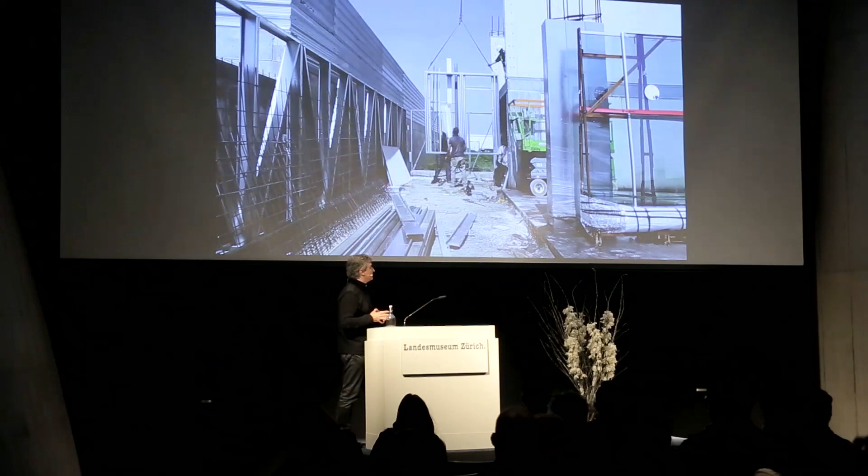We've been obliged to do the bones of the building first, the domino, and after you fulfill it with other parts. In this case, what we're doing is exactly the contrary. The first thing that we do is all the building, layer by layer, except the domino, that is injected at the last minute and ultimately provides the performative stiffness of a concrete building.

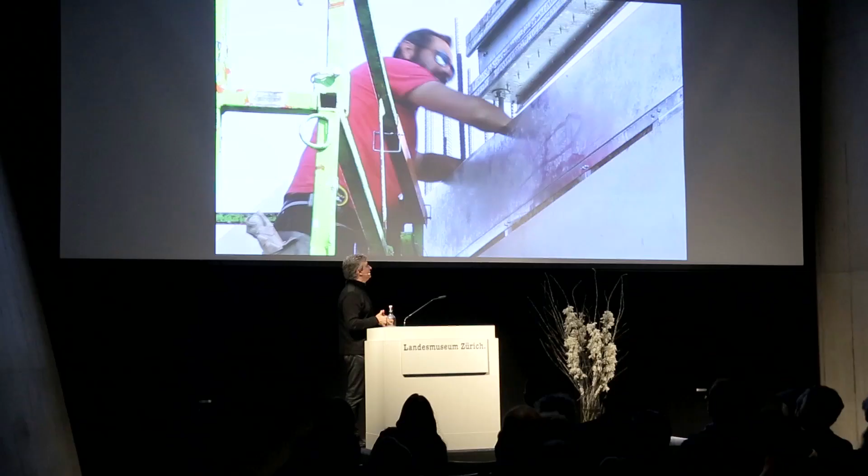So this has taken us to the point where we are now working to develop a lot of structures that we had never done before, to serve a research and entrepreneurial commission, where architecture is fully flat-packed, pre-manufactured in ultra-lightness off-site, that could be transported not only by flatbed trucks, but that could be inserted in a container. And this suddenly opens the marketplace.

Worldwide. And that, once it's assembled, it contains the stiffness of the most universal and available of our materials, that is concrete. So to do this—these are also pretty recent images—we're now under construction of this new understanding of what a studio is.

What I've learned by being at MIT is that the practice of being an architect is challenged. Maybe here in Switzerland or in Spain, we still enjoy the pleasures of being an architect as a master builder, where you have the conversation open about engineering, about craft, and the interactions with the construction place. This, as you all know, of course, but the rest of the world is very different.

The architect is kind of a designer that does some drawings and leaves them apart to do others. And what I showed you in my early 21 years of career, we were the builder. We were the master builder of all our buildings. That's what we enjoy the most.

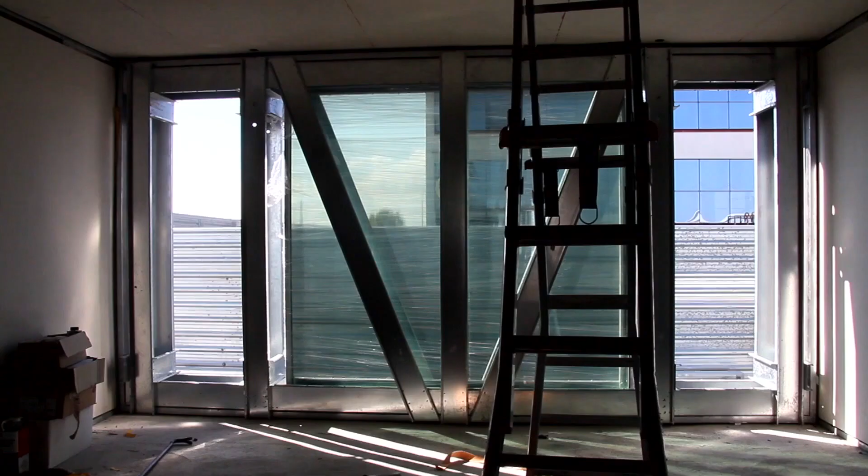So now we understand that to maintain that condition, we have to take extensive use of the capabilities of technology and try to connect the data—that is the project, the idea, even money is data—to matter. Shortcutting everything that we have in between, the contractor, the subcontractor, the executor. And I think this connection is possible, and is how I anticipate it could transform how we understand today the practice of designing and executing the construction of a building.

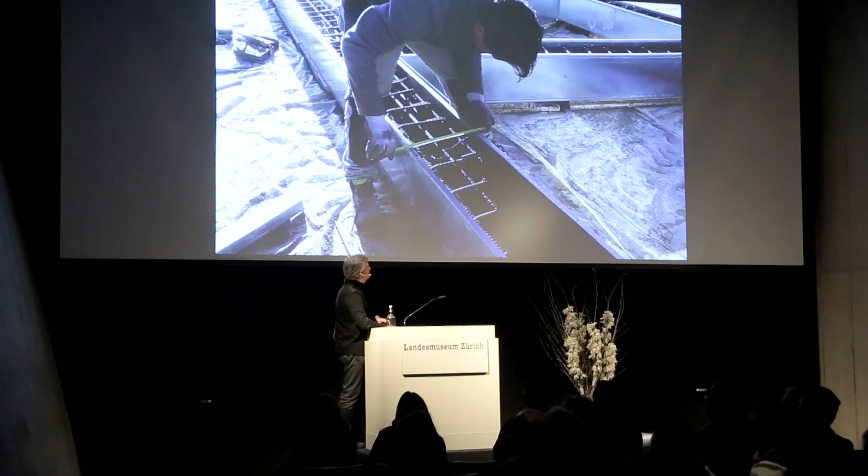This connection, driven by technology, not only through the engineering and design process that we are already in, but creating that connection to the parts that do fabricate all these elements, is what I think will make the big transformation.

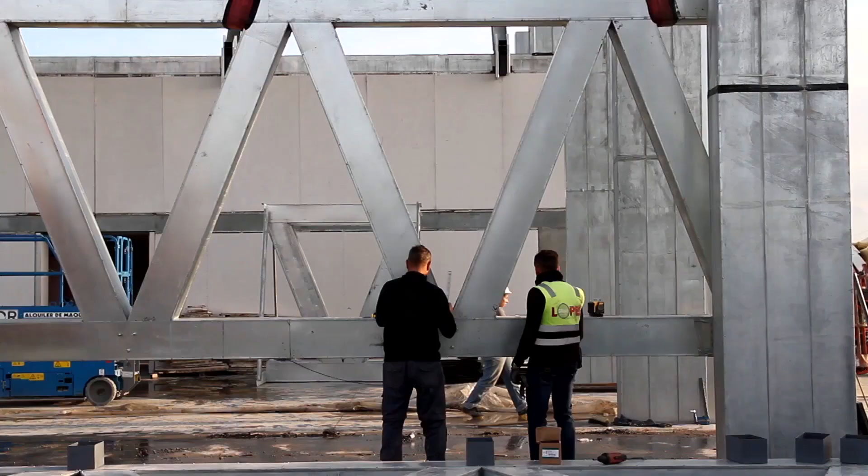Here is what we are doing with our technology. This is very light, but self-supporting, cold-molded trusses. That's a 20-meter span truss, that is either injected with the concrete when it's already standing above with some shoring, or could be done in a traditional way, cast it in place and lifted today. But it could also be prefabricated offsite.

In this case, we're doing it. All this construction, we're doing it ourselves. That's why it's taking us so much time and effort. Everybody you see there is part of Ensamble Studio, we're not working with contractors, because the next phase of this project is to upscale this to a greater typology of high-rise or mid-rises that we're now designing, extending the usage of these logics of lightness versus weight. Thank you very much.

Thank you very much, Anton. I'm a little bit speechless by the power and poetry of these images, but maybe the audience is not as speechless as I. I want to open for questions.

Hi, thanks for the lecture. I was really amazed how much you spent in the pre-process and how much you think about how the buildings are constructed. Do you give so much thought also to the life cycle of the buildings and how your materials will live on? Because nowadays it's quite an issue, the reusability and recyclability of buildings. Is that a thing you think about?